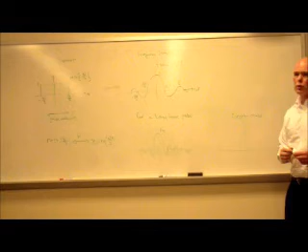For a short pulse, what happens? It's going to be more spread out.

I was exaggerating there. So let me write it up here. What do we say, a long pulse time... for a long pulse we get close to zero rest, I guess it is really close.

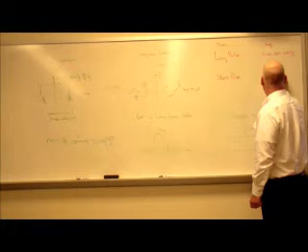And then for a short pulse, I use the very technical term far away. What does this mean? So this is time domain here, and frequency domain there.

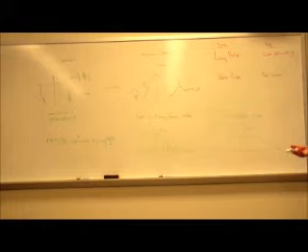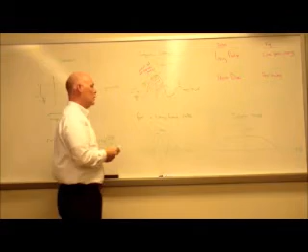If I looked at this signal, where is most of the energy of my signal? Energy being the area under the curve. Where's most of the area under my curve of the sinc function? Remember, it's decaying by 1 over x. Where's the area biggest? Where's this at the first part? In this first part, right? So most of my energy is contained there, right? The rest is decaying.

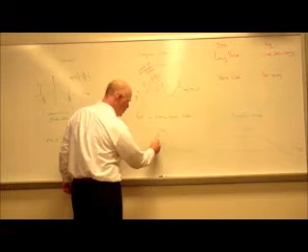So what does this say about how big of a bandwidth, how much frequency I need in order to transmit a pulse? If I have a long pulse, here's my energy. If I have a short pulse, there's my energy.

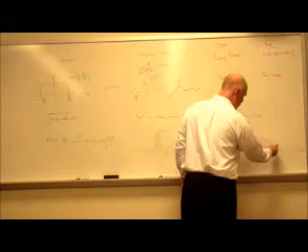What about the bandwidth that I need for these two systems? Bandwidth meaning how much frequency I need. Should I just get my car and go to Michigan now? What's going on?

But you're gonna need a low frequency, I guess, for the long pulse and a high frequency for the short pulse. Yeah, I need a lot of frequency in order to get this pulse through the channel, right? If I have a short time domain pulse, the energy is spread out over a wider frequency range. So I need more bandwidth.

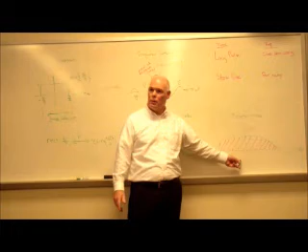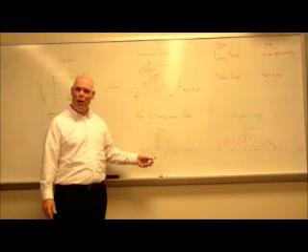If I have a long pulse, where's my long pulse? I guess I didn't draw the pulse. But if I have a long pulse, then my energy is more closely centered around the origin, which means a smaller frequency, right? I don't need as much bandwidth in my channel to transmit that pulse.

So how does this relate to modern day life? What's your internet access at home? Anyone ever remember the days of dial-up?

Right? How much bandwidth, or what was your data rate then? 56 kilobits per second? Right, so that means the pulses were, in order to get 56,000 pulses in a second, they had to each be a slice of that, right? 1/56,000 of that, right? So they could all share that.

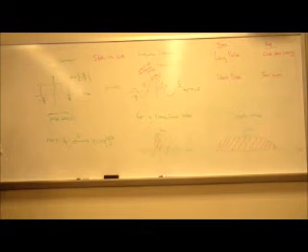What's the throughput now with like DSL or cable? It's like 10 megabits. Yeah, 10 megabits, something around that, right? So you went from 56K to 10 meg. So what happened to the size of the pulses in time, the width of those pulses?

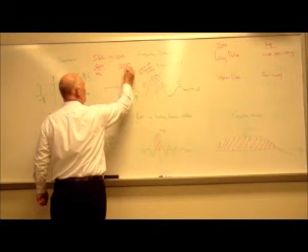They get bigger or shorter? Yeah, sure, right? Here I only had to put 56,000 per second, right? Now I've got to put 10 million pulses in that same second interval. So each pulse got a lot shorter.

What happened to the bandwidth required to do that? It got bigger, right? And that's why you couldn't do dial-up anymore. Because the phone wires that were buried in our homes were just twisted, in some cases not even twisted. So they couldn't support, they didn't have the bandwidth to put these short pulses.

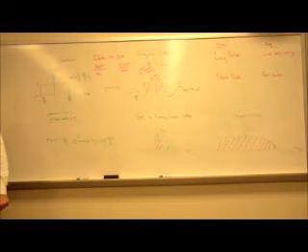We had to go to coax cable and the cable company that can support a much wider bandwidth in order to get these tiny little pulses in. And then the phone company said, well, wait a minute, we're not going to lose out on this. We'll put in DSL, which meant that they had to redo every wire on the telephone pole coming into your house so that they could get a bigger bandwidth, get these short pulses.

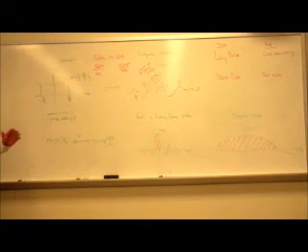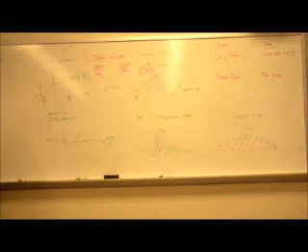And that's why the sinc function is so useful, especially with communication theory. If you go into communication, you'll see a lot of use of the sinc function because it relates what the width of my pulse is to what I physically need to support in my channel in terms of the data rate and stuff like that. All right.

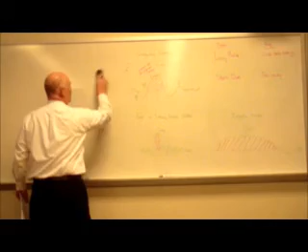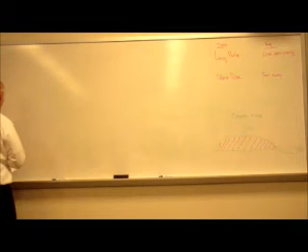So by far the rect function and the sinc function are the most widely used Fourier pair. But there are other ones. Triangle.

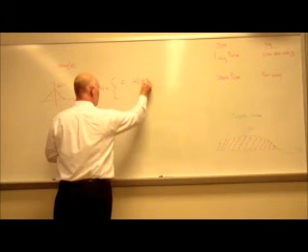Cleverly referred to as a triangle. Triangle and a T. Triangle, I can't even do it. Triangle of T is equal to 0, magnitude of T greater than or equal to 1/2. 1 minus 2 absolute value of T, absolute value of T less than 1/2.

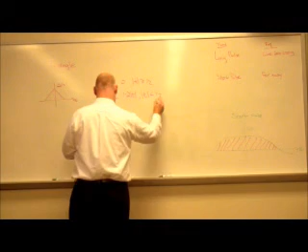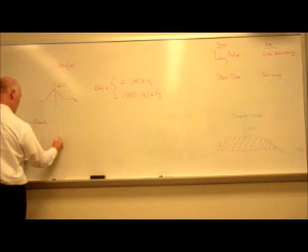That's just the mathematical equation for it. We can scale it. Oops, I guess I didn't put the units in here. 1/2 minus 1/2 and a height of 1. And these are defined functions, right? Mathematically defined.

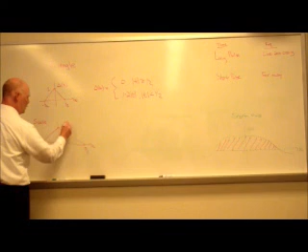Scale: minus tau over 2, tau over 2, 1. And then this would be triangle of T divided by tau. Again, tau would be the base.